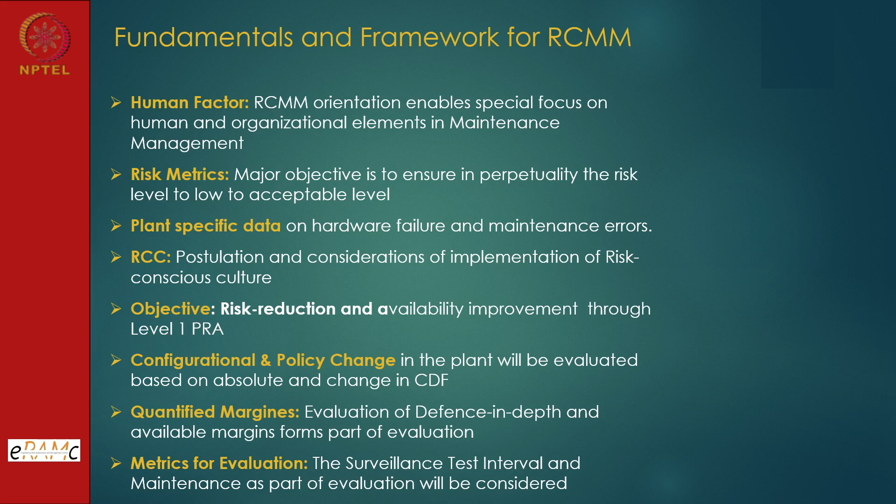So these two models are there, and my book on risk based engineering brings out all these aspects. This particular risk conscious operation management is from my second book, where the focus was on operations management. Now, what are the fundamentals? When I am putting the word conscious, I am bringing in the component of human, and the human factor is cognition, consciousness, and conscience, because now we are discussing safety risk and security risk. So it has got a larger canvas to capture both risk and reliability with this connotation of RC.

And then risk metric. The major metric is core damage frequency. In the nuclear parlance, core damage frequency is used, but risk can be discussed at any level. You have to define your hazard, then a risk component, performance of the plant, and then the risk perspective enters there. So the definition might change, but risk is the primary metric, whether it is large release frequency or core damage frequency, or the consequences in the public domain at level 3 of PRA. We should be able to come to risk because it is risk conscious, so all the parameters will derive from that perspective.

Now plant specific data. For risk conscious maintenance management it is better, because this is the only way we can embed it in plant culture. So whatever data we use for risk conscious maintenance management should be plant specific to the extent possible. If the plant has operated for 10 years, we must have enough data because it is a periodic activity; for certain components we do it monthly, quarterly, or maybe weekly. But if no data are available, we can use a qualitative matrix based on expert opinion. And implementation of risk conscious culture, as I told.

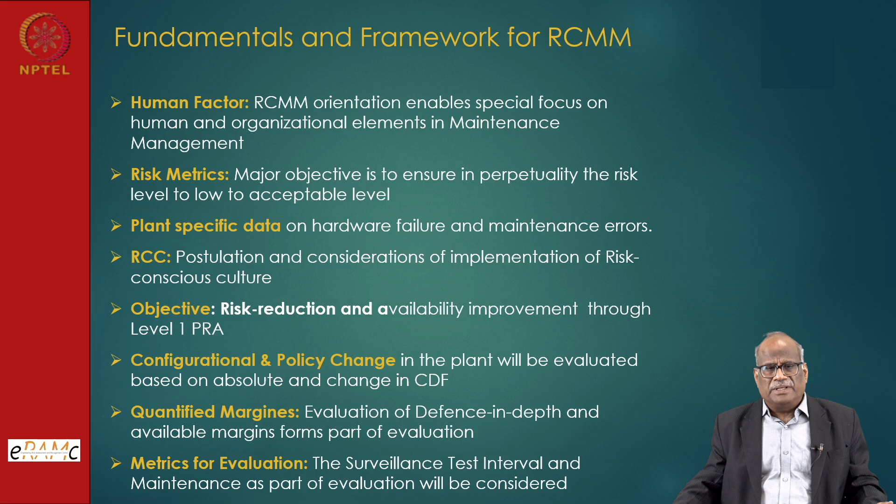Though in those days, in the era when systems were being developed, it was kept as a term based on judgment, but now we have quantitative metrics available. If the data is available, we can do it. Metrics for evaluation, the surveillance test interval, and the maintenance part of evaluation will be considered. So here one example will be presented, so that we get the right perspective of what this methodology is, what it can do, and how we can benefit.

So as I told you, risk conscious culture: how I'll develop it based on my data that is available, and then what are the standard metrics available in national and international documents, and from there I would try to see which are the strengths of my plant and which are the small areas of weakness of my plant, and I'll work on my risk conscious culture.

And that doesn't start in operation, it starts right when the designs are going on, when equipment is being built: whether there will be sufficient space for maintenance, what tools are required, what kind of conditions the maintenance staff will face. And those postulated scenarios become part of the design, and then finally percolate down to operation, maintenance, and refurbishment.

So the role of RCA can never be overemphasized. Root cause analysis, though initially it might look an expensive proposition, and expertise is also required, because if you want to do a proper root cause analysis, we have to have a lot of data, information, models, methods, and all that. But in the long run, the same problem which was there in one pump, if we understand the root cause to the human level, then we can reflect it in tens or fifteens of pumps, and you will not be surprised that the same cause was there for all the pumps.

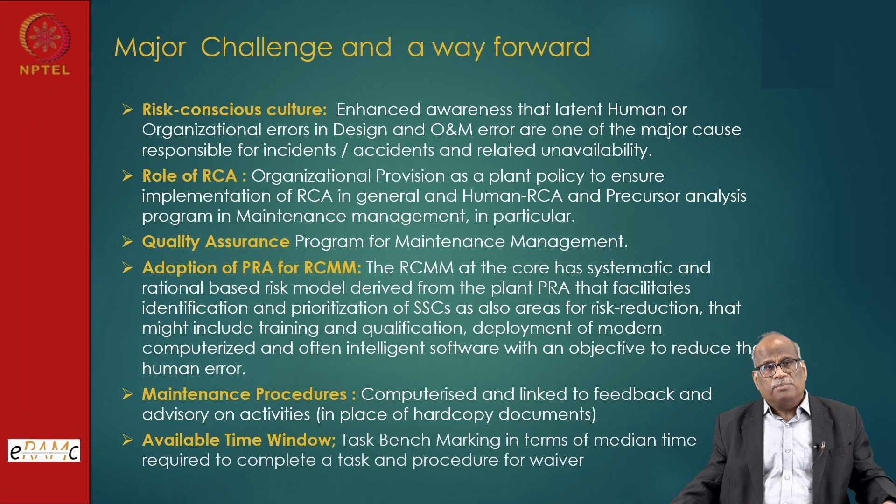So these kinds of challenges are there, and we have to bring them out. I am not saying they are not there at all. They are there directly or indirectly, but in a formal way, if we want to implement this risk conscious operation management system, these things are the prerequisites. And then technical specification optimization. The technical specifications are derived based on the traditional approach, the deterministic method.

Even today, the state of the art is they are derived from the safety analysis documents, where conservatism is the principle, then defense in depth is the principle, and there are many things. So conservatism itself, if we take it, now we have data. So can that margin be reduced by presenting the data, and again going for risk-informed decisions only. So whatever limitations are there in the deterministic approach, they can be compensated or managed through probabilistic risk assessment methods if the data and models are available.

And I think we are in this era where PRA is becoming part and parcel of regulation, operation and maintenance. So if I have to limit the major risk-informed applications to technical specification only, I told you technical specification is the document which everyone has to follow in the plant. If it says for this condition the plant should be shut down, it should be shut down. If it says power should be derated, it should be derated. In a total verbatim manner, it should be respected.

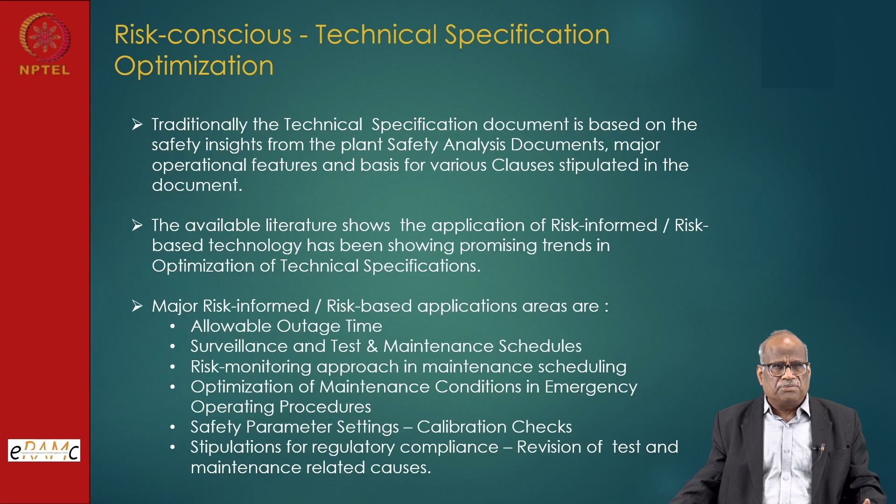Safety parameter setting, calibration checks: if any drift is there, they are corrected on instrumentation. Of course, it is related to instrumentation. And stipulation of regulatory compliance. There are separate clauses where regulatory oversight is implemented to ensure that the compliances are in place. So these are the scope of technical specification where maintenance is related directly or indirectly.

But so far we had discussed only three: breakdown, periodic and preventive maintenance. But if you see the evolving scenario, and if you want to get the updated state of the art and R&D, you will see condition monitoring, which I have discussed. This is being implemented, but at a very limited level for very special components like shutdown emergency pumps, or if the pumps are required for higher reliability of the plant. So there should be a matrix where it should be divided, and probably risk assessment is the best metric available, where this concept can be extended across the plant.

And since reliability methods were there, I just mentioned reliability, availability, maintainability and safety, so RAMS it is called, those methods were available. So this reliability centered maintenance starts from the qualitative level and it can be a quantitative level also. At the qualitative level, a reliability task force should be formed, and they should review the modes of failure and correct the maintenance efforts periodically. If the failures are more, then we have to enhance our maintenance activity. So it can be at qualitative or quantitative level, but the scope is at the system and plant level. Condition monitoring remained at the equipment level only.

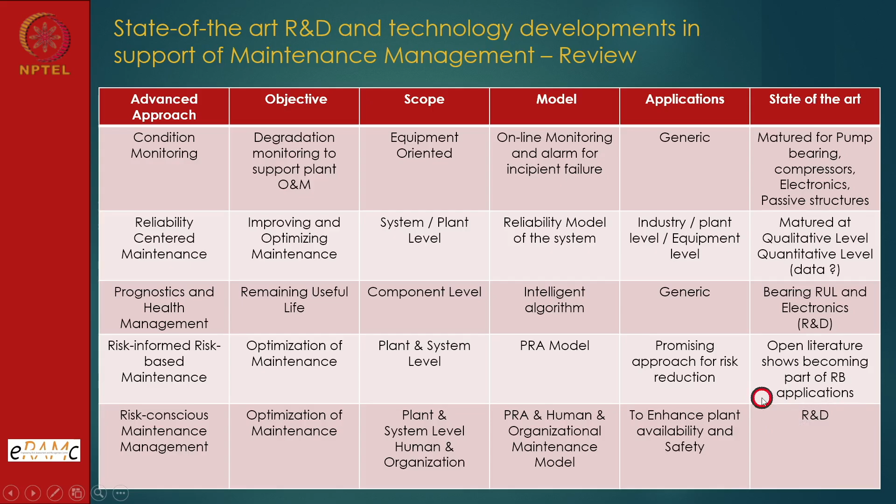And risk-conscious maintenance management is relatively new; my book was published somewhere in 2023, and probably if we integrate the human element, we might get the icing on the cake when we use it. And of course, I would admit that further R&D is required for implementation of this approach.

Okay, then what is the role of probabilistic risk assessment in maintenance? How can we relate them? PRA is at the core of RCMM, because whatever I do, there I use the plant data. That means data is coming from the plant. It is reflecting the plant characteristics.

Then I do the risk modeling. That means it is getting converted into risk of failure or probability of failure, and it is joining at the fault tree level or at the initiating event level. So PRA is part and parcel of maintenance management, risk-conscious maintenance management. And the metric could be core damage frequency.

LERF we will not discuss now because it is level 2. That means once the hazard percolates into the containment, only then does this come into the picture. So we will remain with risk per year, that is core damage frequency for a nuclear plant. For other plants, as I told you, you can take your hazard and you can have a risk statement.

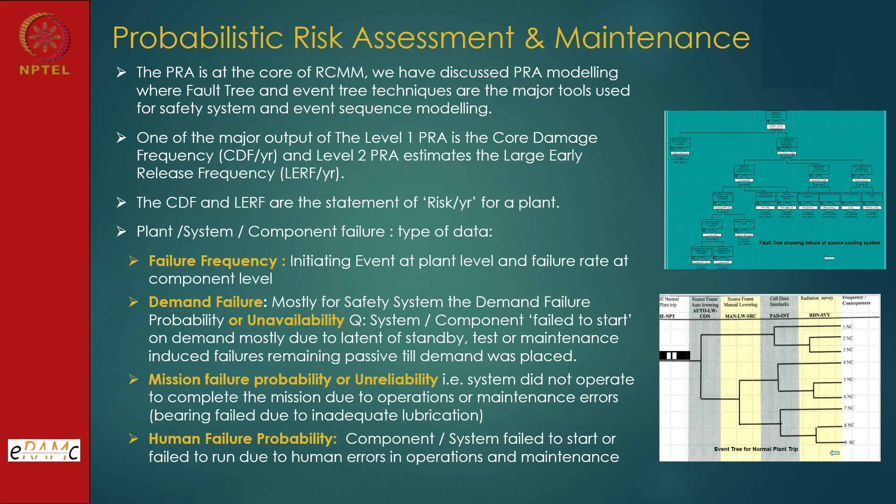So I don't mind repeating the sentence that even today the human factor has been a major contributing factor to accidents. If you see all across the spectrum, whether it is aviation, railway, coal mines or space systems, everywhere this data is available in the open domain, and it forms part of the risk modeling.

Okay. Now this is one IAEA model that they have given here, where we have risk as a target, but then we have raw data available with us, and then we have test and maintenance, human unavailability, rated availability, and then through the PRA model we do prioritization and revisit maintenance requirements, and that's how we touch the risk targets.

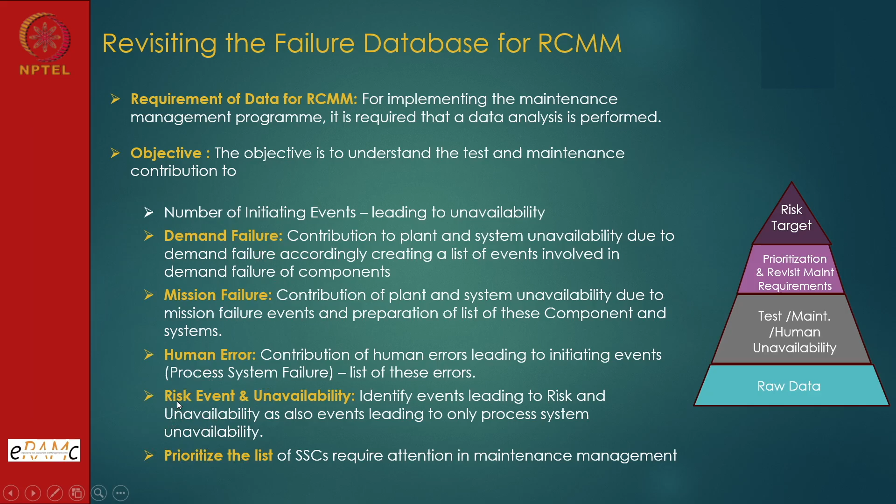So data, mission failure, human failure I have given in the previous slide, and then finally we have a closed loop where we draw the benefit of structuring the risk-conscious maintenance management.

Okay, now let us focus on data, and suppose the PRA model is not available, how will we prioritize our data? Common cause failure is one of the big no-nos that should not happen in the plant, because it kills all the redundancy built into the system. And if common cause failure is induced by humans, then it should be given the highest priority, because we are talking about risk-conscious maintenance management.

Then second, I think you must be knowing, yeah, I have given the abbreviation. Okay, so common cause failure from O&E, organizational and environmental. So if that happens, some smoke, it leads to similar identical redundant equipment failure, or flooding in the area leads to all the equipment failing.

And that's why to handle common cause failure, if there are 3 redundant equipment, one will be put at a different location and 2 at another location, or all 3 might be put at different locations, whatever is allowed. We can do this only at the design stage, but if the plant is already designed, this option is very limited.

Then the common cause failure, that is software component failure. You know that this is one of the big issues, whether the safety critical system can be designed and can have software on 3 or 4 redundant channels. And so the question is, if there is a software bug, then all the channels will behave the same and it can bring the system to shut down. So as of today, the state of the art is, if we are using a digital system, there should be a hardware system, relay-based system, solid state system to compensate the safety issues that might crop up with the software failure.

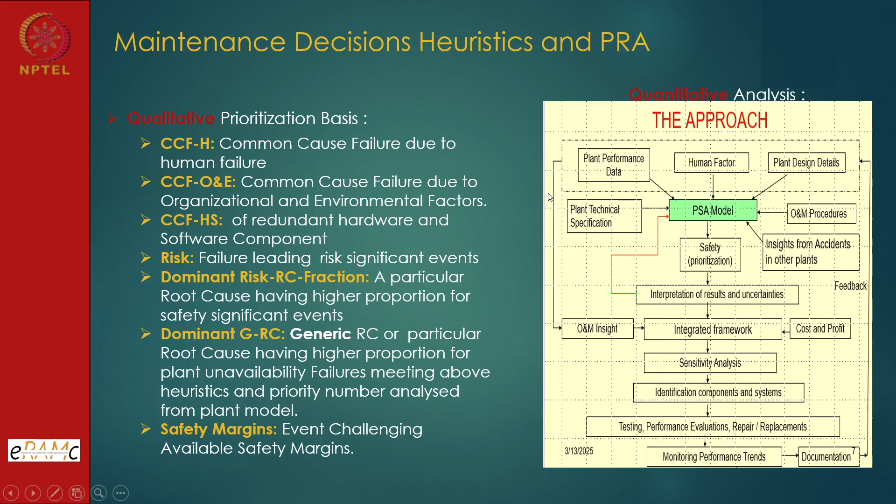So even if I have a plant which brings it in a systematic and rational manner at the PRA level, I could do at least 80% of my job actually, of prioritization and all that. And here we have risk metric, PSA, safety prioritization, interpretation, very well made sensitivity analysis. That means I am able to see the impact without any brainstorming, on the plant, where human factor, plant design, all those things, and then monitoring, for system, for feedback, monitoring and all that. So these two are the approaches where maintenance can use this data and prioritize their maintenance activity.

So real-time risk reduction. Now there is a situation: some plant is operating and 1 hour is required for maintenance. Can I take that equipment out of service for maintenance? If I go by my technical specification, it will give some crisp stipulations. But if a risk informed culture is available with my plant, I remove it and I'll see there is no risk increase. So can I take it out? As of today, using the traditional methods, we cannot do it. Whatever is written in tech spec has to be followed. But this provides an additional window wherever risk informed approaches are implemented as part of regulation for operation.

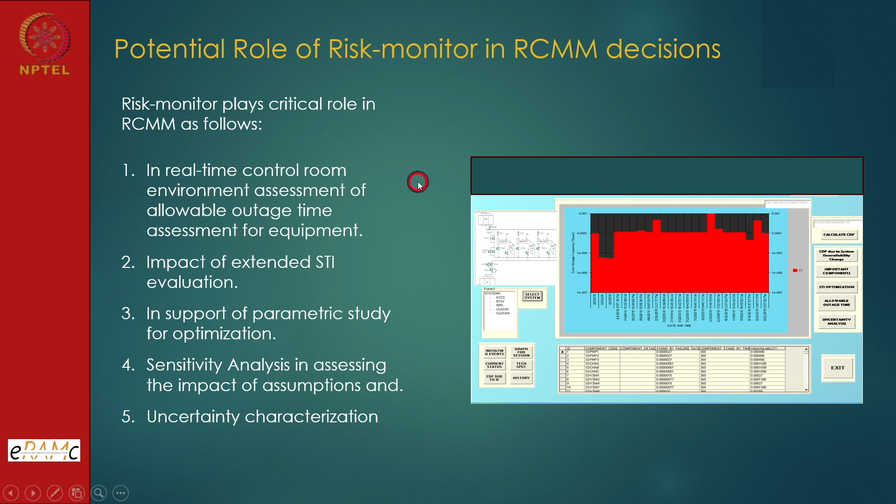So suppose I was testing a certain system and by chance, because of some big problem, one pump was to be replaced. So it took more time. Can I start my plant with that system, with hardly half an hour or 1 hour or 2 hours remaining? So can I start my plant? So the risk monitor allows you to visualize these things. So more risk assessment tools and more benefits.

So in this lecture we have discussed PRA, its role, risk informed, risk based and prioritization of SSCs, and the risk monitor in online maintenance, how it helps, as I just mentioned in the previous slide. So this is our lecture on PRA and risk, and now we will move on to our next lecture, on framework and implementation.